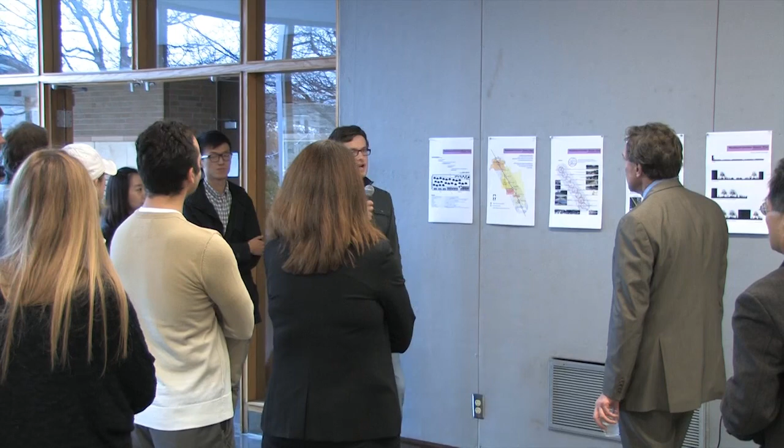The project is looking at the extension of a proposed light rail system into South Oakland County, which would extend from 8 Mile to 16 Mile, covering multiple jurisdictions, all of which are involved with the task force. Our charge was to basically create a master plan for this area, and we've since divided into groups, trying to come up with different alternatives, not only about land use, but also about how the system will work at grade, and what kind of design implementation we can come up with.

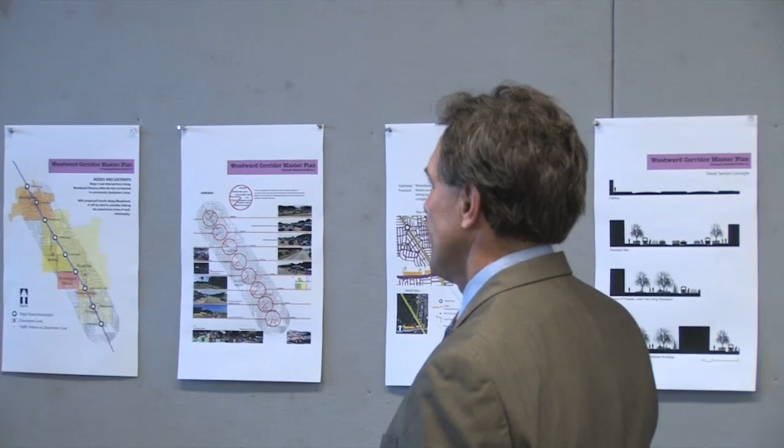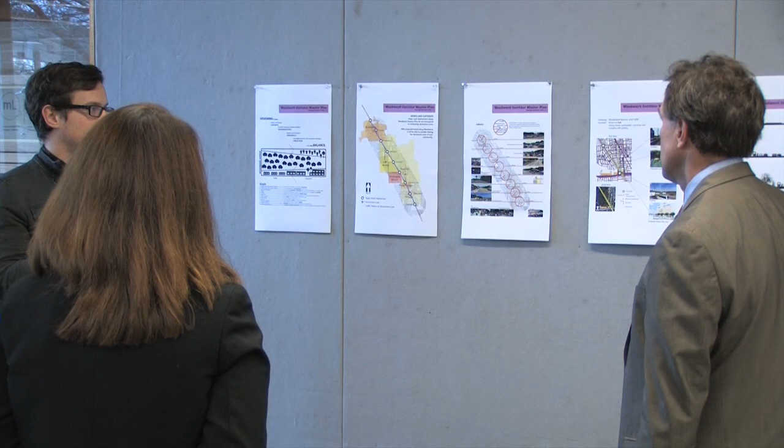I was asking the question, what is a sponsor? Well, the projects aren't a client, so they're not paying us, but Dr. Kim has worked with different project sponsors, community organizations. They had come to him to utilize our studio to assist them in this design process. They have a lot of planning and policy in place already, and that's the foundation, and they wanted us to come in and complete the design end of it.

Cool. I want to talk to the Chinese last. I want to say, isn't this crazy? This is completely crazy, right? We'll come back to it.

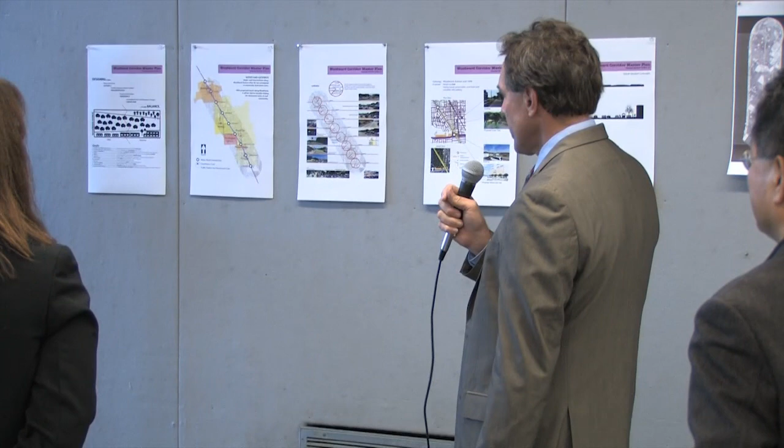I've had 3 trips to Beijing in 2005, 6, and 7. I've been there and worked on certifying the Beijing Olympic Village under LEED ND. That's my little bit of contact with Beijing. But this is crazy. So I was saying at lunch that I favor right now planning for totalitarian countries, because they can just execute. Tell me, you're the planner, tell me your idea, good, build it, and it just gets done. That's fine, it's a little ruthless some days, but at least it's done.

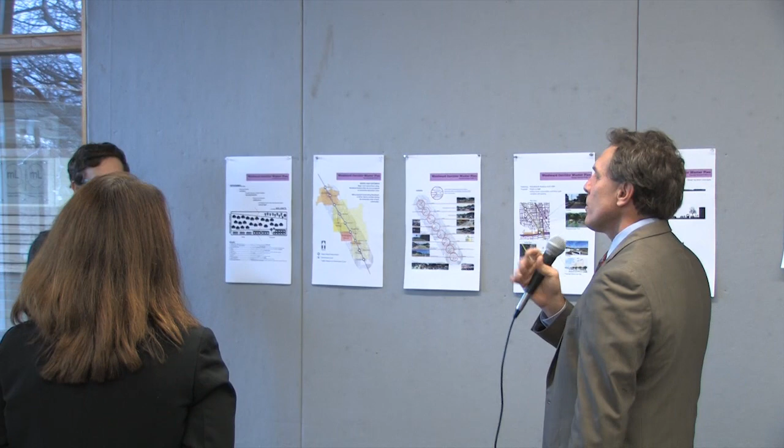So what authority, do you have power or do you have authority when you're doing this work? Are you generating ideas? How do you feel like you're interfacing with people that can actually get things done?

As far as getting things done, we've met with quite a few people from Berkley, SEMCOG, MDOT, and DDOT, and we've gotten a lot of feedback in between. We've been able to bounce ideas off of them, things they want to see happen, things we thought could be possible, and we meshed our ideas together to come up with some pretty decent ideas or pilot programs we could put in different places. As far as authority, we've been told many times don't worry about the actual implementation part of it, that's their job. Our job is just to come up with the concepts, the details, the renderings, to take their ideas and turn them into actual images that they can sell to the community and sell them on to get stuff going.

So I think in that aspect we're slowly getting there, getting more and more information from different people, and as it goes on we find out more stuff. More people are willing to contribute things that they find, because this is Woodward, and there's been many studies, and right now there's one where they've just gotten like 19 million dollars to do another study on it. I think SEMCOG has that, so they're going to be doing their own study, and I believe WA3 and somebody else are actually going to give us their huge findings pamphlet once it's completed, so we'll have all that information to go off of.

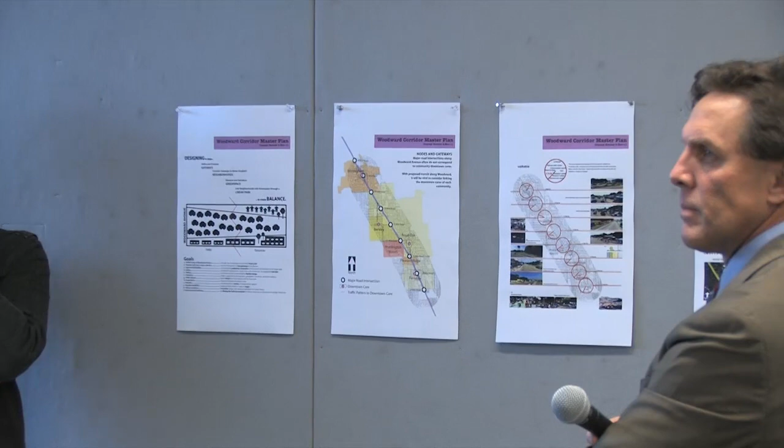And there's large graveyards, and when you first look at it, there's graveyards along Woodward Avenue. This section right here is a gigantic graveyard, and there's another one right here, and I think 2 more along there. So when you look at that, you realize it's a huge, gigantic space. When you first think of cemetery or graveyard, you don't want to touch it, but what we found out from talking to them was that Berkley has tours of their graveyard. So they were saying you could use spaces like that to create more of an entranceway onto Woodward, creating pathways through a graveyard that people would be willing to walk through.

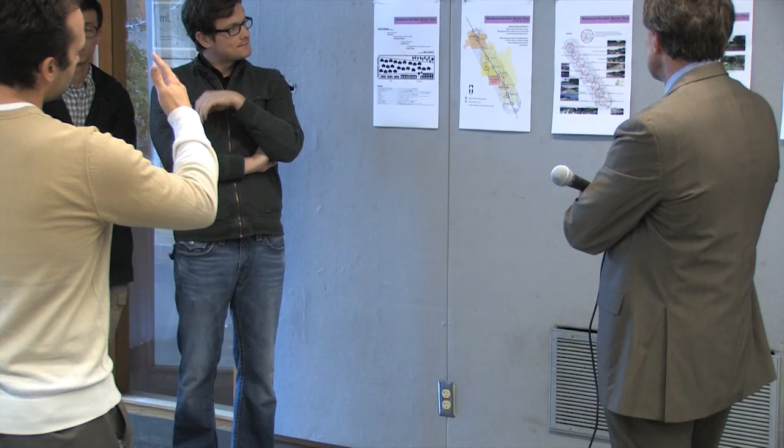So using that type of area to create more of a promenade, places where people can walk in and out of Woodward. That was one of the ideas. Looking at more mixed use, because the residential area is so close and tight knit, right along the back edges of a lot of the buildings, you really can't tear someone's house down and redo. So it's about finding where we can implement more mixed use, how far we can go up, and bringing in mixed use lets you bring in people willing to live and use the light rail, building up commutership. So we were looking at stuff like that.

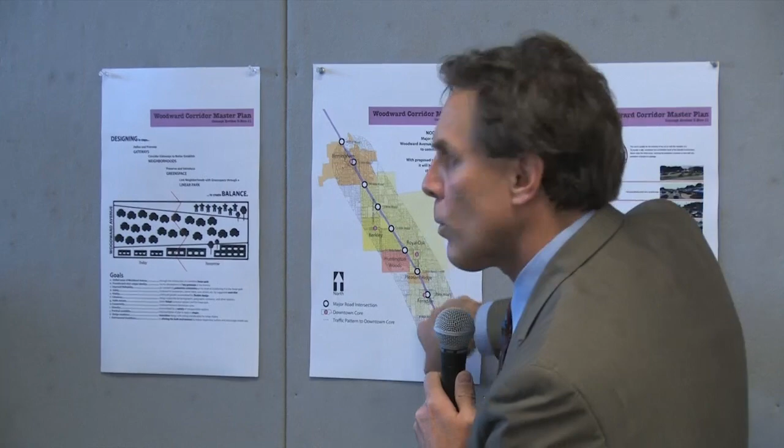So my next question: in doing a corridor study like this, there's a tension between natural places, and on this map I see 4 downtown cores identified. They're a place type with a certain walking pattern. I don't think I heard the suggestion that people are going to walk the 9 or 10 miles diagonally. They want to create that, but do people actually walk that far?

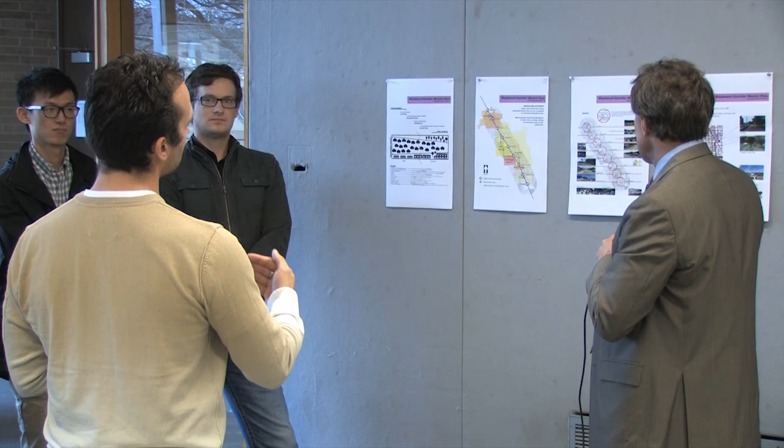No, people do not walk that far. But what they want is to try to turn Woodward into at least a walkable environment, because some spaces have long stretches of concrete or a long wall of a building, and they want to change that to make it more inviting so people don't just stop and turn back. They want it walkable for anyone willing to walk it. They don't expect you to walk 9 miles - that's what the light rail is for. But in between stops, they want that environment to be friendly and inviting, creating a place where people would be willing to stay for a while, which some places on Woodward actually lack.

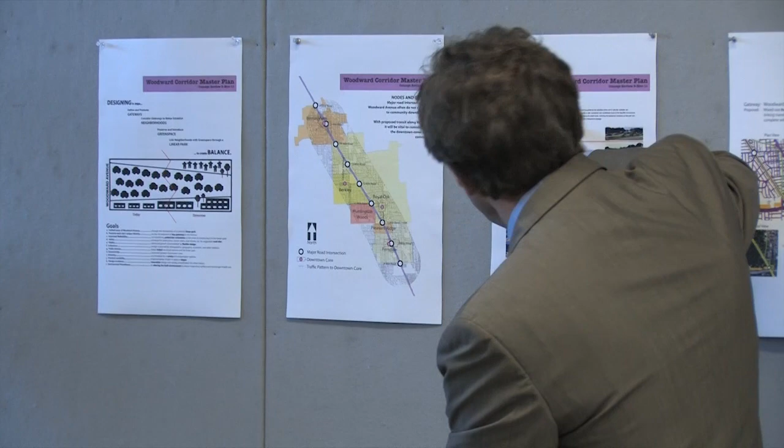What we did is look at Woodward, the corridor, and major roadway intersections - those circles represent the major roadway intersections. As you can see, the major intersections don't necessarily correspond with the downtown cores. So our thought was to take a look at what exactly is a half mile from those major intersections, and then see how much further the downtowns are. So our plan incorporates not only transit along the corridor, but we also tried to come up with a way to link these downtown cores. Our thought was to introduce some type of linear infrastructure that could wind through alongside the corridor, so we'd have 3 types of transportation: the roadways, the transit, and this linear park for walking and biking, etc.

Do other team members want to add anything? You drew the circles too, putting the center at the major mile markers as opposed to the half-mile markers. Talk about that.

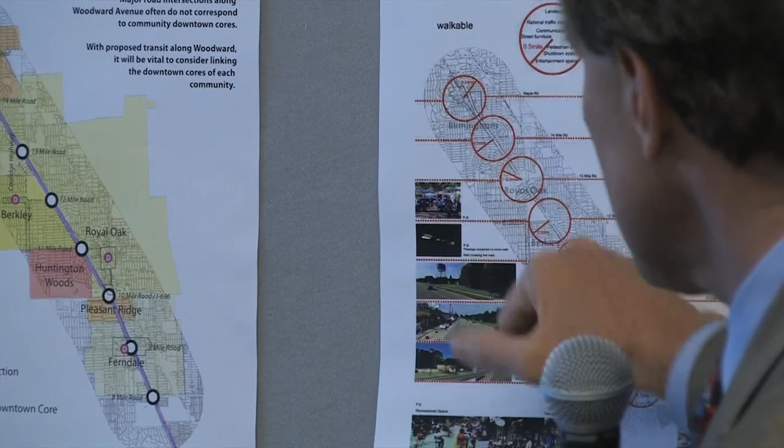A question for you: I can see some of these images beginning to capture how auto-dominated Woodward feels, and it's a pretty rough patch to walk. When you do a TOD plan like this, you can imagine a really big mile road divides that circle into 4 quadrants, so you won't cross from one to the other because the street's so hostile. Sometimes you can't even cross Woodward.

Do we know the dimension of the Woodward right of way? It's like a football field wide, 200 feet, 300 feet? Do we know the number? Some places are 225 feet across, so it's quite large. It's pretty imposing. I think an interstate superhighway is 300, is that right? That's pretty much the acme of unwalkable. So at 225, you're at the outer limit.

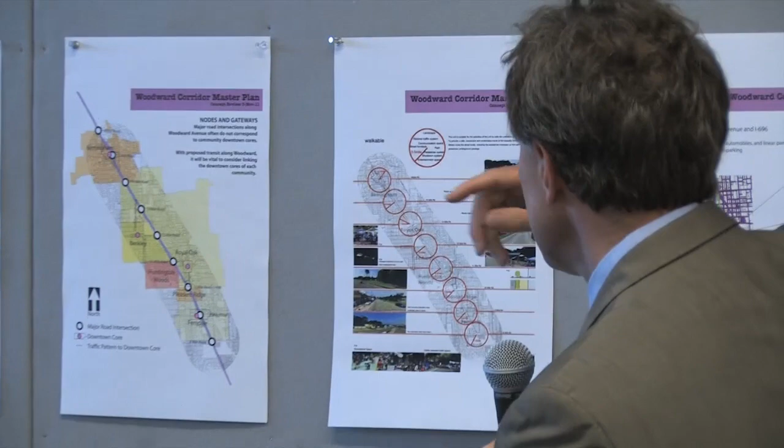Just a couple things to say. We've worked on a bunch of corridor studies that are TOD corridor studies. One is when your group reconvenes to draw new circles, you can draw some bigger and some smaller, or use some as fill and some not, whatever, because these are all a little different.

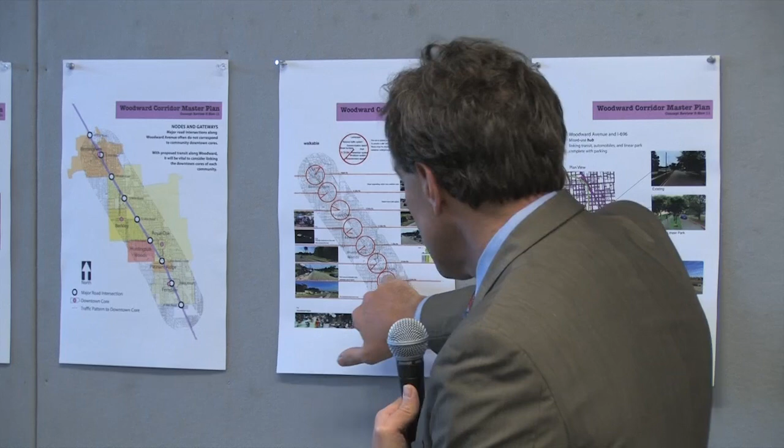Second thing, consider those half-mile markers. I don't know if people have visited Chicago - come to Chicago, you're welcome, you're hereby invited. Because if you look at where the commerce does well today, sometimes there's legacy, like 9 Mile in Royal Oak, or is that Ferndale, whatever - there's inline stores doing just fine. But sometimes when you want to start new retail, if that street is too wide, if the distance from one store to the other across the street is too wide or too difficult to cross, it won't work as inline walkable retail.

So you look for a right-of-way that's no wider than, in our experience, about 66 feet. Do you know the right-of-way widths for each of these streets? We do not. Okay, go measure for the next go-round, because if it's too wide, you really do have 4 quadrants, and the circle is your idea imposed on a different physical reality. Time's up, right?

Can I ask a question? Sure, please. So, do we need to be mic'd?

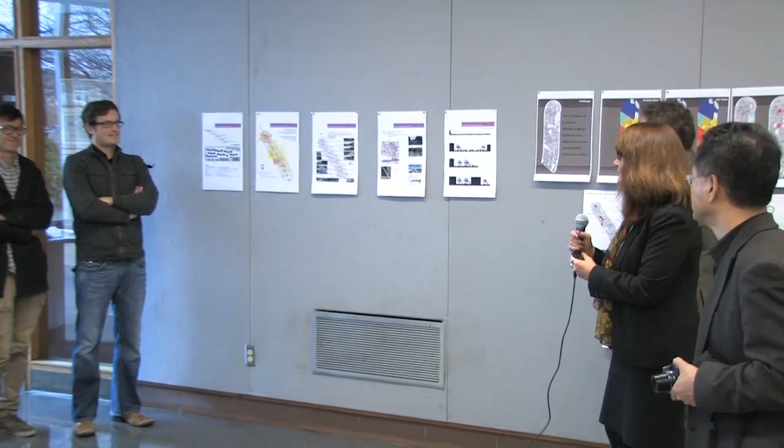Yes. So just to clarify, did your client group site the rail stops for you, or is that part of your charge, to site the rail stops? It's part of our charge. Okay, and did your group do that? I noticed there's a map over here, the group we're moving to - so you haven't gotten to that point yet? We have some ideas and some concepts, we haven't finalized our decisions, but this is the direction we're heading.

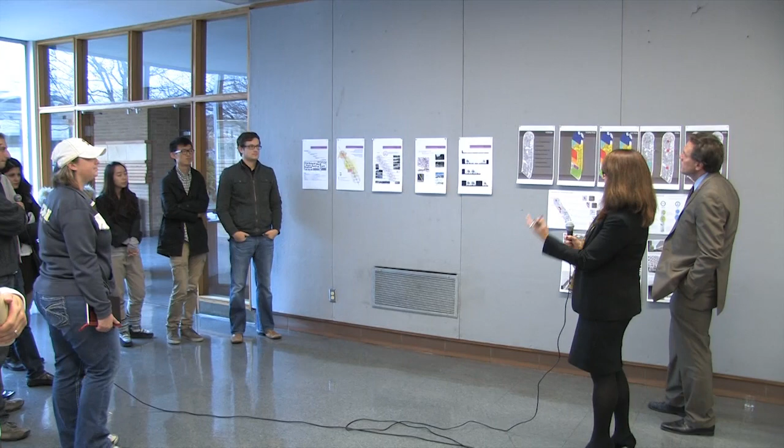The only other comment I'd make is that each one of those communities you've identified has such a different character and demographic profile. Maybe get some sense of that differentiation, that character, as you're documenting your existing conditions, and I think opportunities would flow from there.

Actually, can I comment on that? Of course. That's actually one of the things that Eric brought up, keeping their identity between city and city, along with creating one single identity at the same time. So it's kind of the mesh between the two we're working with right now. We're just starting, but that's kind of the proposed direction.

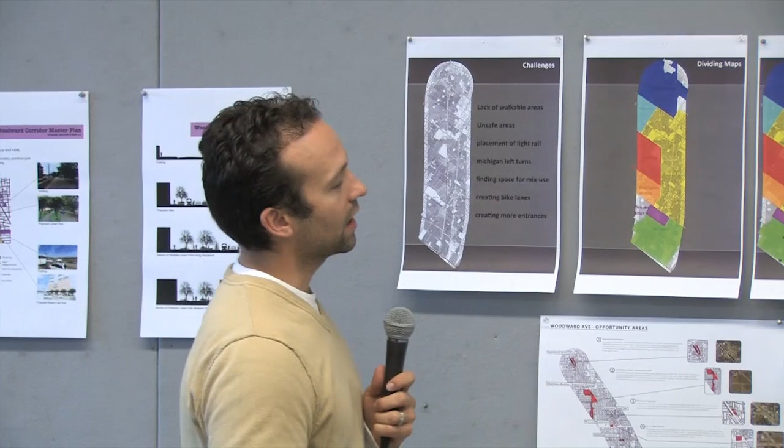What we first started to do on the top row was figure out some of the challenges, and then we divided the space up into its 6 quadrants, the 6 cities we're going to be dealing with. Then we looked at the different rail stops, and of course, in this type of plan, every city is going to want their own rail stop. You can't leave anybody out or you're going to have some issues. So we did 2 little spots where we tried to lump them in to where we could have a few where we can catch 2 cities with this one.

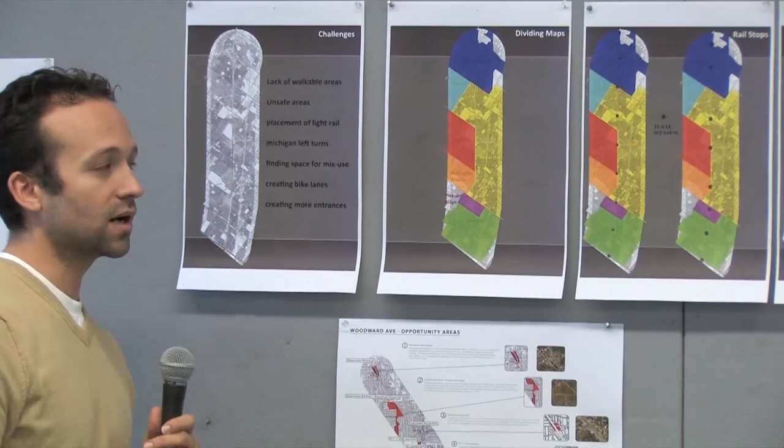We can actually catch 3 cities with this rail stop, 2 here, and then some of the larger ones get their own, but at least we can catch them. Then on the other side, we can actually move it down a little into their own section so they can have their own rail stop. So we're looking at the position and how much ownership each person gets for this rail stop.

Berkley and Huntington Woods, because they're on one side of the street, are going to get that side of the rail stop, depending on how much it is. Then we looked at different style nodes, the large commercial areas in this district.

This map shows what are perceived as known nodes. After some of the first assignments, another group was nice enough to do walking and talk to people. These are the three areas that seem most known and recognizable on Woodward: the zoo around Berkley, and the cemetery and hospital areas. These are the three well-known places — when you asked people, they knew where they were.

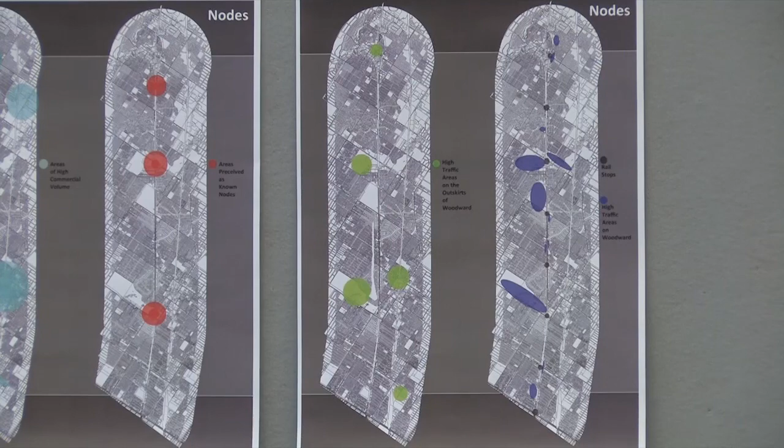Then we go into high traffic areas on the outskirts of Woodward, things we have to pay attention to, like how far the zoo goes out, and some other things. But I also wanted to look at what high traffic areas actually connect, and we found there are actually gaps in between a lot of these spaces.

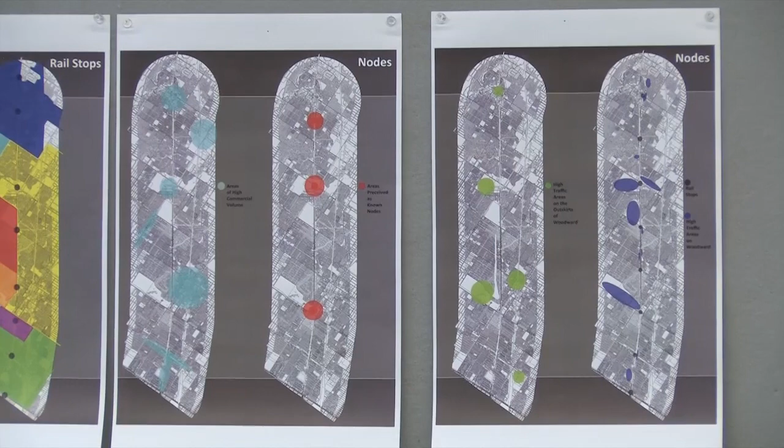Right now we're looking at whether placing a rail stop in the voids, which isn't normally done, can create spreading and more business. Or do you place stops within existing areas, which is what's normally done, to help the business that's already there, letting it spread out and create better, longer, wider nodes. So that's what we've looked at so far.

Now Dan will go over his two portions. I wanted to ask—

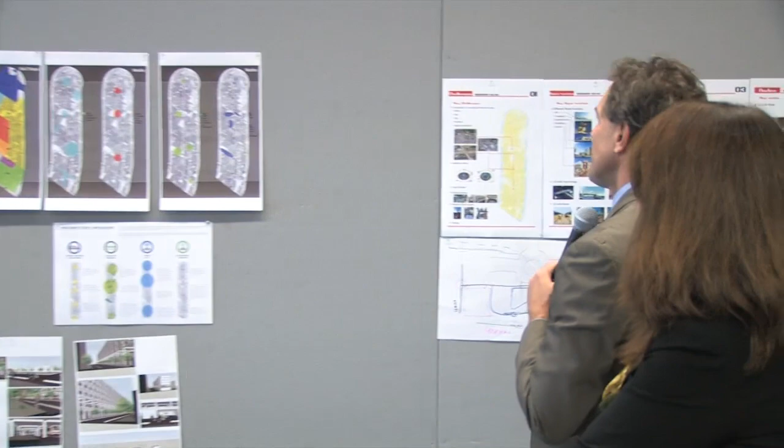Is it a coincidence that the hospital and the cemetery are co-located? I was kind of wondering the same thing. Seems like a co-location.

So then we wanted to look, from that and also from the workshop we conducted with our project sponsors, at areas we considered prime for opportunity. As of right now, I've identified five areas along the corridor. Right in downtown Birmingham, the downtown as it exists is situated along Old Woodward, but Woodward Avenue juts off to the right, and it's not as pedestrian friendly or as much of a downtown feel.

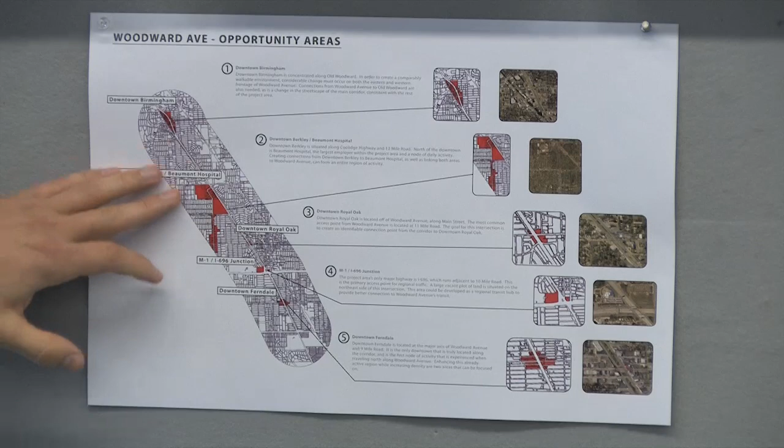So that's definitely an area of opportunity. Also, linking Berkley and the hospital and creating a larger node because of their proximity and because there's so much traffic and activity around those areas. Downtown Royal Oak, being able to link the downtown with Woodward because it's really offset, not right along the corridor.

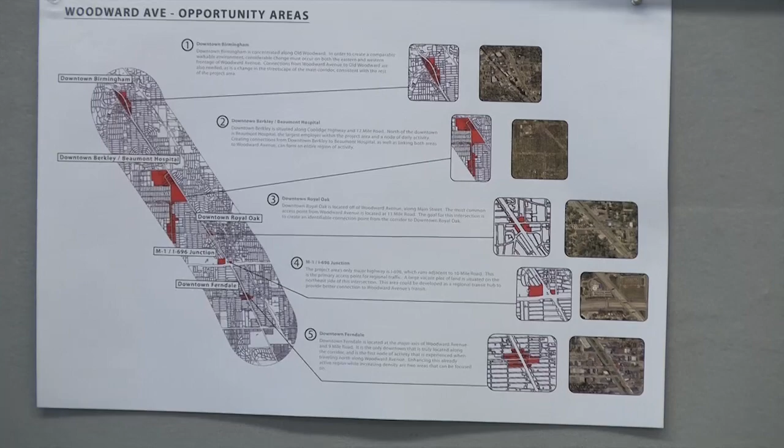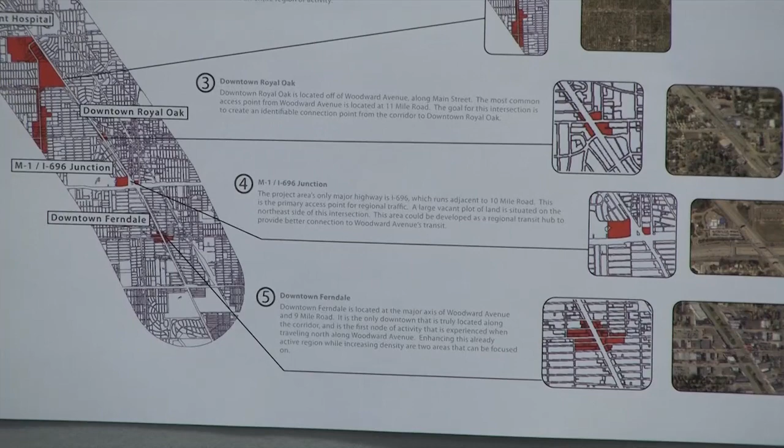Right at 696, there's actually a pretty good opportunity to create a larger transit station and a regional hub, right here. You have the zoo, and across the street a larger plot of vacant land. Because this is a major axis of commuter traffic due to the expressway, we thought this could be a prime location where commuters could come in along the expressway, park, and then utilize the new transit system.

And then also Ferndale, just enhancing and implementing more density there. Tell me about this stuff especially.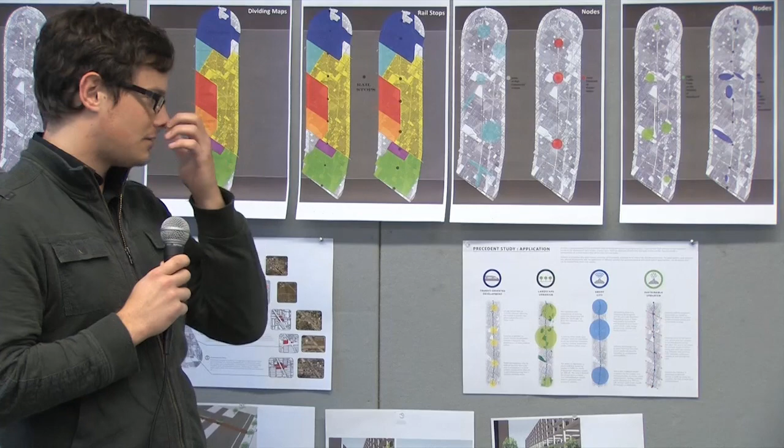Well, we actually did a precedent study. It was part of our second step in the process about a month ago. We looked at four different urban design or urban models, and what I did was try to translate what we learned from the precedent study onto the map, just to give a conceptual feel of what that would look like.

Sustainable urbanism, which is your area of expertise—I tried to think about it basically as a means of applying it to transit. I didn't want to go into as much detail about land use in that area.

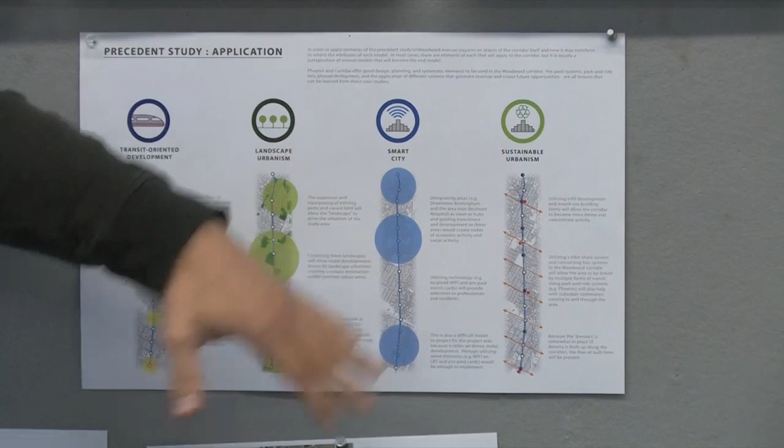What I wanted to do was create better connections along the cross streets, because as it stands right now, the bus system in many instances doesn't actually cross Woodward. In some areas it'll stop along Coolidge and Judd, and it doesn't actually connect. I thought that if there's going to be a major investment in light rail on this corridor, it's going to need connections at all these major cross streets.

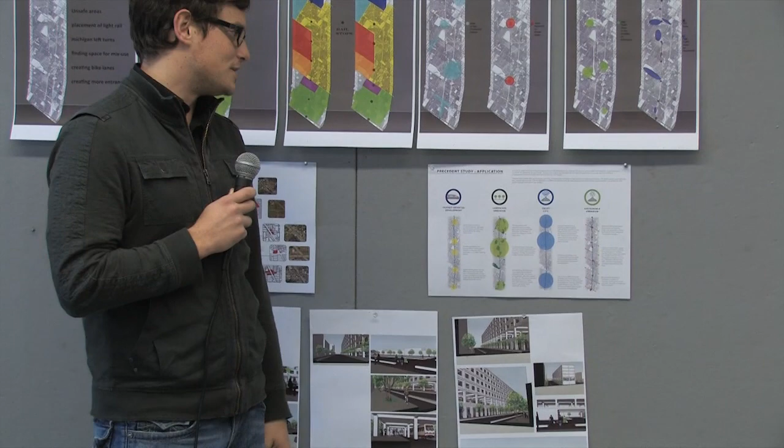Also implementing more park and ride, just because it's such an auto-oriented region—that's definitely something that's going to have to be considered. And then also creating possibly a bike share system, because there are so many downtowns offset from the corridor that are walkable. By creating a bike share system, people could use transit and other means to access those.

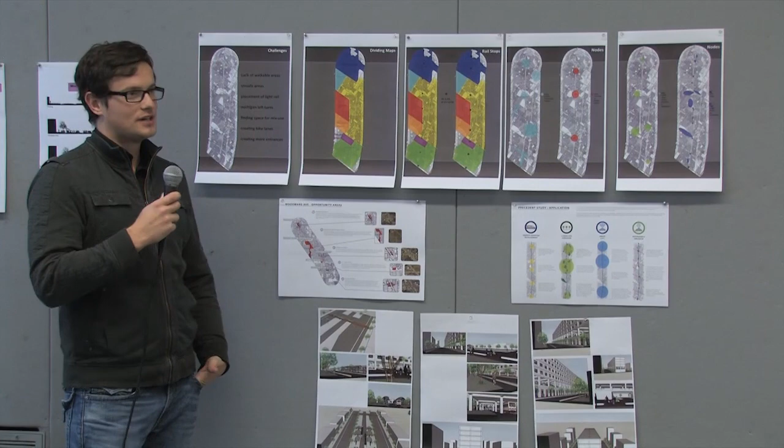Cool. Two questions: are you studying density along the corridor, recording it in some way? We don't have specific numbers at this point, but density is definitely one of the big areas we're going to look at, because traditionally along the corridor, at least commercially, there's one-story commercial with front parking. That's pretty much the norm along the corridor.

So improving that, improving density, really recessed into these neighborhoods—it's all single-family housing for the most part, except for downtown Birmingham and the other downtowns, but just adjacent. And that's also a challenge as you increase density along the avenue.

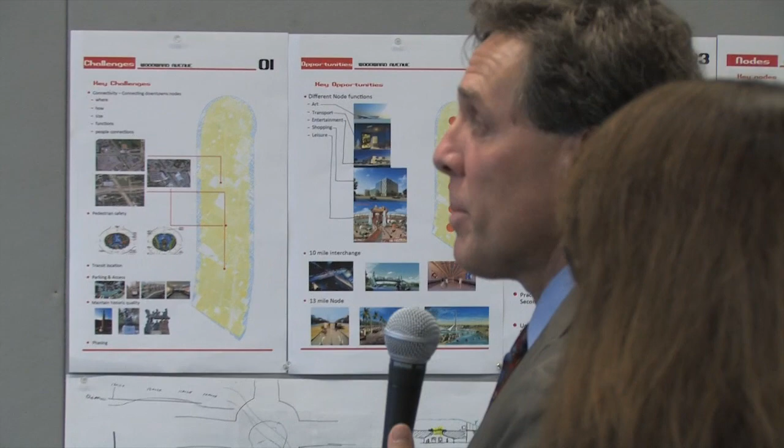The other thing I'd want you to poke around about is finding out if you could look at the census data for households without cars. Yes, it's possible to live in Detroit without a car. Oftentimes it's driven by poverty, which is not preferred, but you'd be surprised—I bet in Royal Oak, I bet in Birmingham, there are people that do it. It'd be interesting to know and map them.

Don't you think this is a change-of-culture project masked as an infrastructure study? If you actually built this, you'd offer a proposition to Southeast Michigan: maybe you can build the cars, you can own the cars, but maybe not here—you don't need one. That'd be interesting. A lot of the work you're doing, you're really an ambassador for—you're the face of this new way of living that could happen here.

I'm a big believer that planners are advocates, and you're out there trying to make connections people often can't make for themselves. So if you can tell those stories and pull them out, you'll succeed wildly.

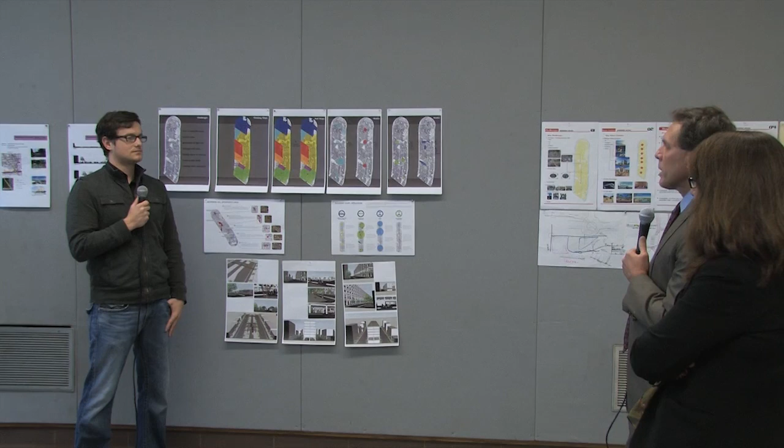I'll push back on the idea that you just think of the ideas and it's the other person's problem to implement them. In school, that's absolutely correct—you should think perfectly freely. But in practice, if you're just the ideas person and you hand it in and it lands with a big thump and dust starts to collect on it, that's a choice. You could practice that, but there are firms that make a lot of money generating reports that sit on shelves, so I scold you not to do that.

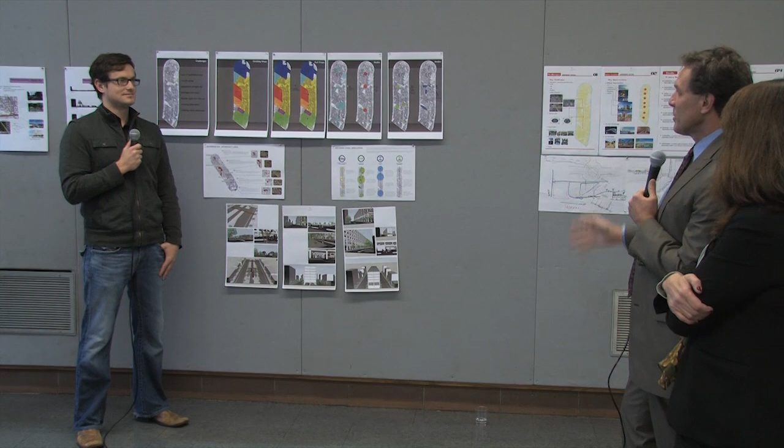I encourage you to be the activist who figures out how to get to 6 out of 6 mayors and get them so excited that the next campaign for mayor is about your plan—like, 'I'm for it more than my opponent.' That happened to me once, and I still have chills about it. That's success, when you reach through.

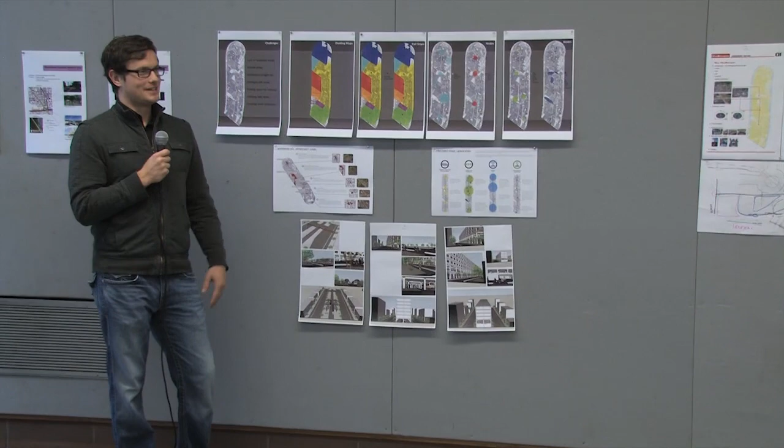How about working with 6 different cities? We haven't really seen the problems that creates, but because they're all invested in this task force, they're already working together, so we haven't had to play the role of mediator bringing them all together. At our first meeting and little workshop, you saw different opinions—Berkley was well represented, so there was a lot of interest and conversation about that, but all in all, they're all working toward one common goal.

So what are these drawings? What's this building right here—is this a building in the middle of Woodward Avenue? That's our ideas about the improvements.

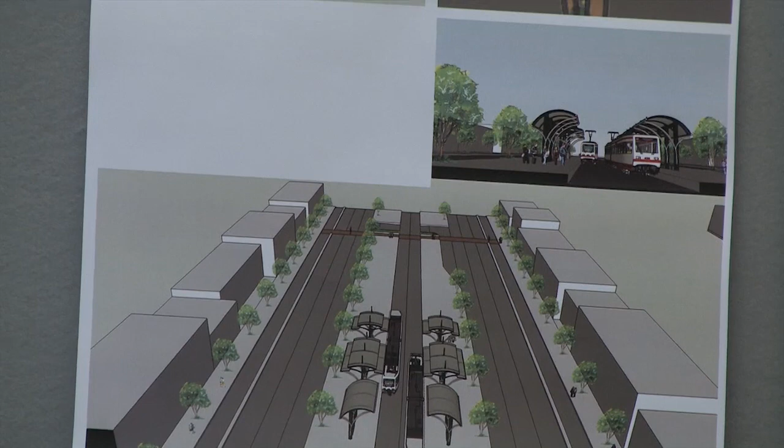I made three models. This is the first one, I think the most initial one here—we're just considering making the rail go in the middle of the avenue. So it will mean canceling one lane.

So after that, we added the two bike lanes on both sides of the avenue. Then we'll plant some trees in the four lanes here, maybe make the road much greener. And that's our first initial design.

We will probably just cancel two lanes on the avenue now, and introduce the track in the middle of the road. That's the station here, with platforms on both sides.

We also made some design at the U-turn section for cars. The cars should go to this lane, the U-turn lane, and wait here because there's a traffic light, since if the light rail goes along this way, they couldn't turn. They just have to wait until the light turns, then go to the U-turn. That will limit the people who use their private cars, I think.

Yeah, and also we have two crazy ideas here. That's the crazy ones, bring it on.

So this one, I was thinking to build a building just above the track—maybe a commercial building, maybe apartments, maybe some other function, maybe a factory, everything's okay. That will narrow down the space of the avenue, so the whole avenue is divided into two small streets that are walkable and friendly for people to walk inside. Maybe we can use some of these spaces as pedestrian areas on both sides, like some streets in Birmingham that are very walkable.

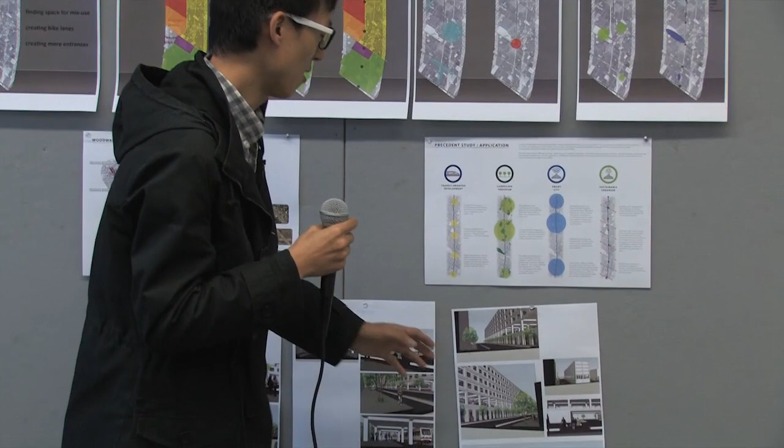So this crazy idea makes the railway run just on the ground, but for this idea I elevated the rail, the track, into the second floor. So the first floor could be used for retail or other functions, more likely to be a commercial street now. I think this one might face too many problems such as noise and other effects from the track, the rail. Maybe it's not quite easy to realize, but it's just a crazy idea.

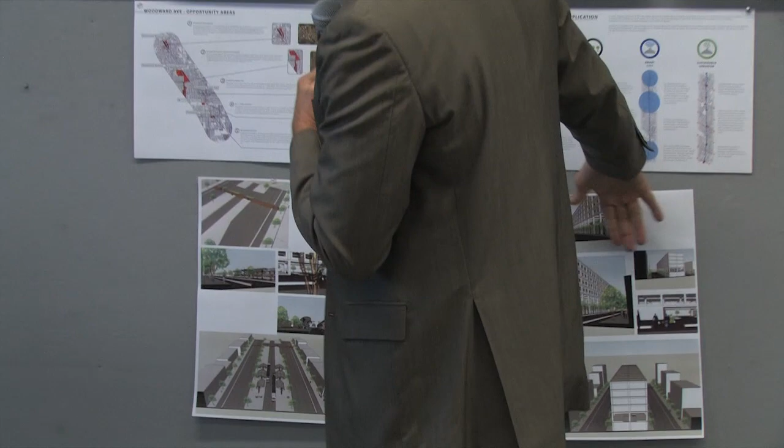They're not crazy. So June and I had lunch today, and I said Woodward needed a building in the middle—this is exactly what I was expecting to see. Thank you, nicely done. But the one thing I was going to say is you've done a good job of arraying choices.

Can you do one more, which is a building in the middle, but the train not underneath, with the train taking up both sides, taking up travel lanes, automobile lanes? Because I think that's not a very pleasant building—you wouldn't want to be under there if you didn't have to. So do one more, but not crazy.

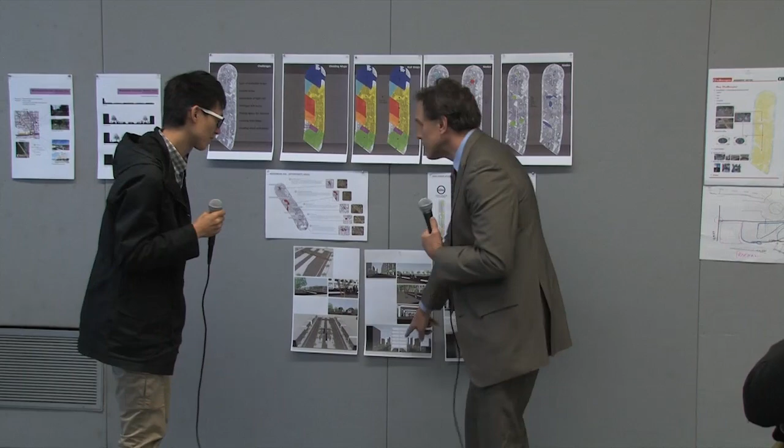It's really neat. Who owns this land? The land now is just grass. It's a very wide boulevard, the median. I know—whose land is it? MDOT. No, it's the state. Correct, yeah, M1 is the state.

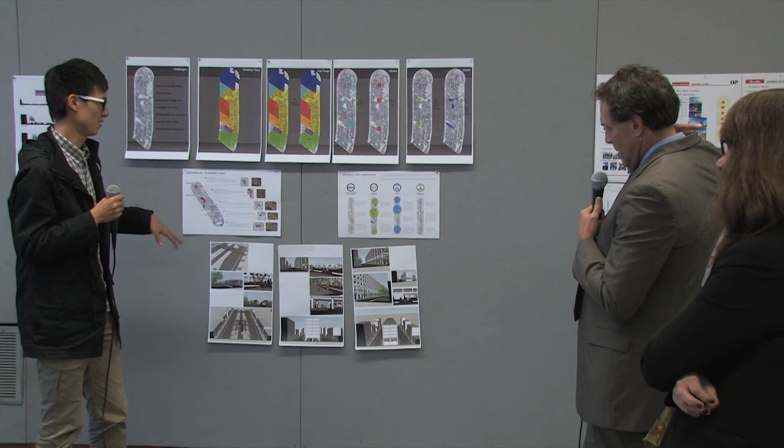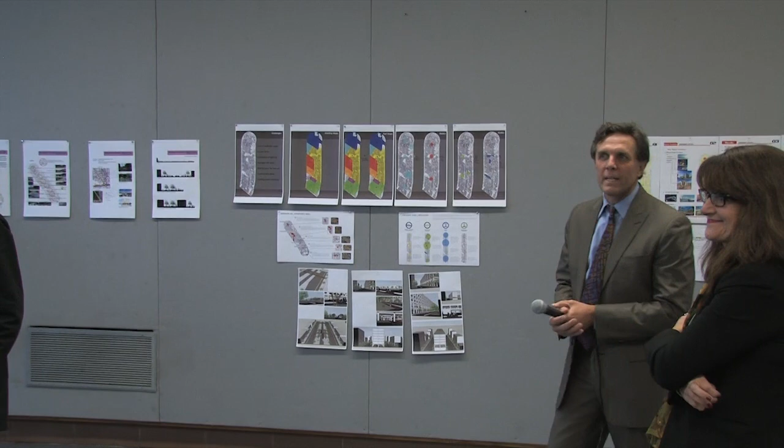Thank you. Who's the tall guy? Hi, good to see you. How are you? Thanks for coming. It's great, we're having a rolling conversation. So Gene is telling us if there's time—is there time to ask a question of this group? I think you should have time.

About my—go to mine now? I'm in the group talking to you. You guys already said? Unless Constance would like to ask, just for one minute.

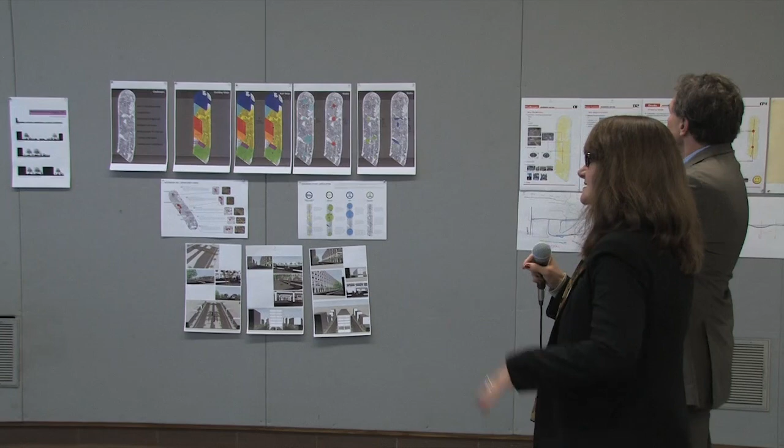One minute? Yes, okay. So quickly, a question about context: are you studying and mapping and analyzing the other light rail proposals along Woodward? Yes, we've looked at the M1 and things like that. We've come across some fake ones that actually seem like they could work—freshwater light rail—it seemed very thorough, but as far as the ones that were actually put out, we've been looking.

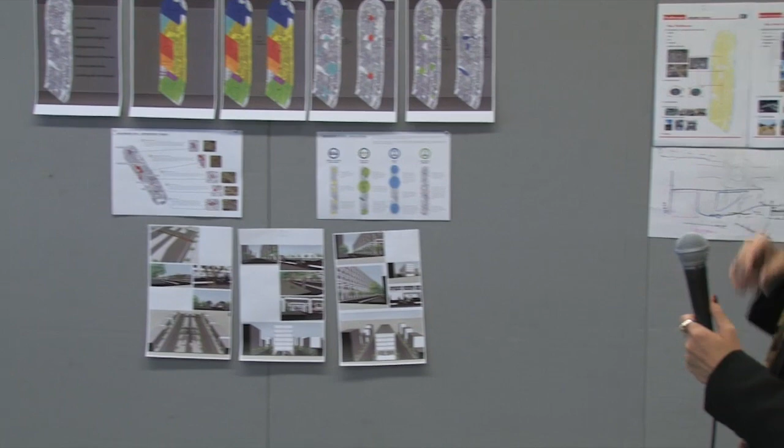I think these bratwurst-shaped chunks of the corridor make very compelling graphics, but as you think about siting stops, these things are generally determined by all sorts of criteria - which system is being used, car length, traffic speed. So the political reality of giving everybody a stop also has this technical overlay, and the corridor doesn't stop and end in your study area.

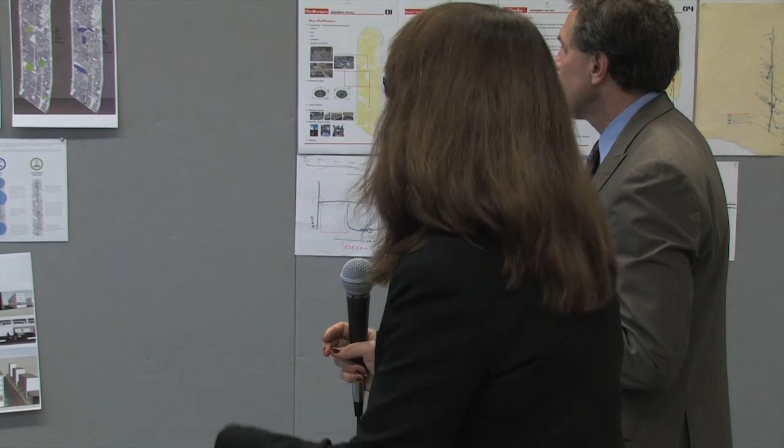I think some sense of what will precede this, hopefully, is the Detroit chunk - from New Center to the entertainment district. And just to reinforce what Mr. Farr mentioned about density, I appreciate seeing it in 3-dimension. If there's any way you guys could do a massing model of just the FAR in the corridor, it'd be very instructive as you move forward.

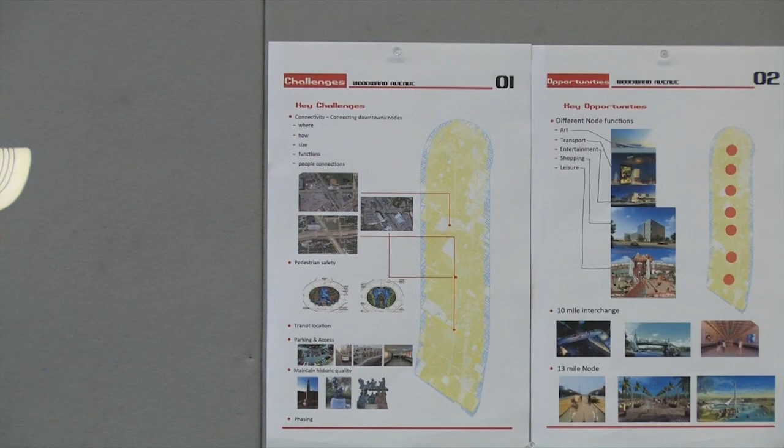One of the first things we looked at is connectivity - that's probably our biggest challenge: how do we connect the downtowns? Where do we connect them? How? What are the sizes? What are the functions of nodes if we create them? Are they just for transport, or do they become something else? And how do people get back and forth between those connections?

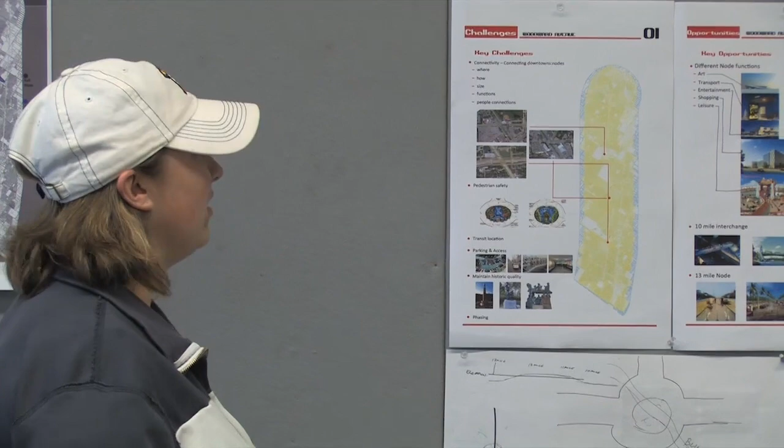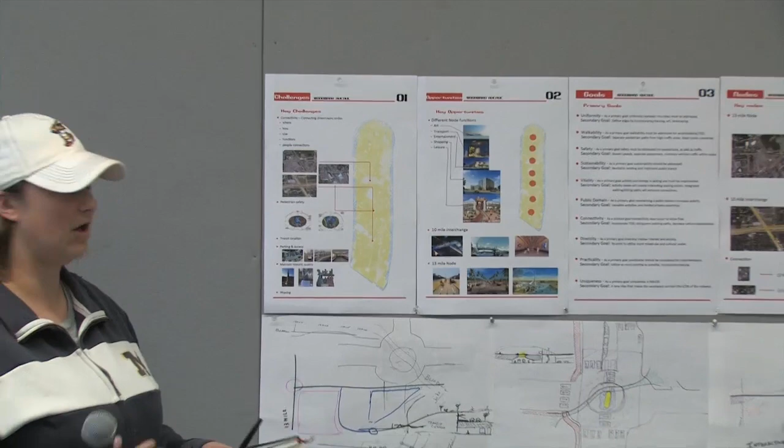The second challenge is how to keep pedestrians safe. They're not going to want to stay along this corridor or walk it if they don't feel safe. So these were some preliminary sketches - do we create roundabouts in certain aspects? Where do we put transit locations? And parking and access - people are still going to drive it, so they'll have to park, and how do those become accessible?

Then one major aspect I thought about is that Woodward itself is a historic corridor - it's known for vehicles, that was the whole reason it was created. So in implementing all these new ideas, how can we still maintain the historic quality of Woodward and not lose the idea of the Dream Cruise and all the big ideas that happen along it? And lastly, the key challenge is phasing - how do we phase it?

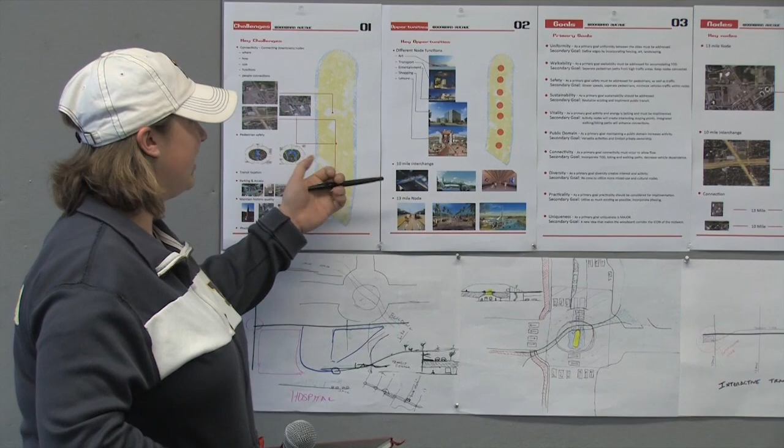From there we looked into the opportunities. As I spoke with the key challenges, we also have opportunities to create nodes and give them different functions - one for art, one for entertainment, shopping, leisure, such as the Detroit Zoo being a major leisure node. Other key opportunities were creating interchanges, such as the 10-mile interchange where the Detroit Zoo currently exists, and also the 13-mile node where Beaumont Hospital is - that's another key node we looked into.

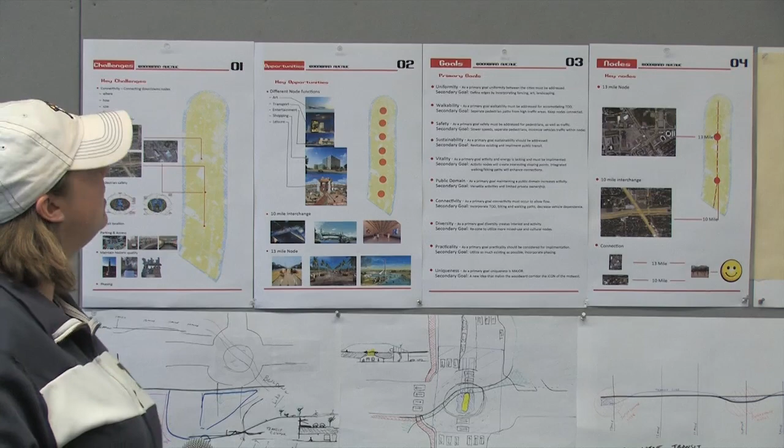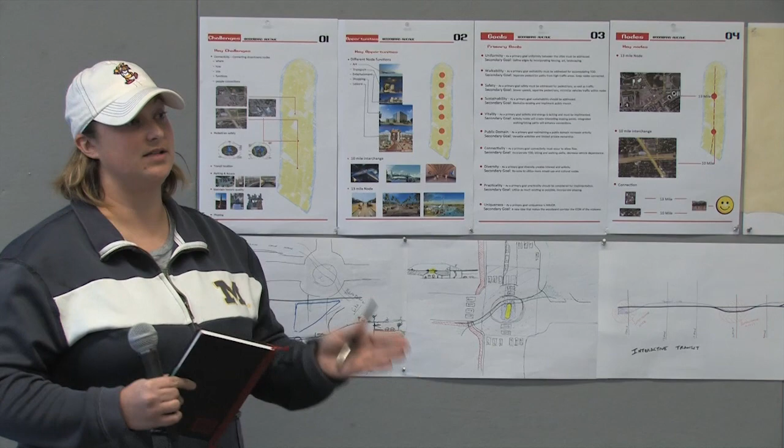From there we evaluated some of the primary goals, and in looking at these we defined the secondary goals in relation to those. The primary goals would include uniformity, walkability, safety, sustainability, vitality, public domain, connectivity, diversity, practicality, and uniqueness. When we think about uniformity, it's obviously how do we maintain this uniform corridor - it could be as simple as putting in fences so all the edges read as one, or placing art, landscaping.

Can I pause and ask - why do you want uniformity? That was brought up in the workshop; one of the groups I was in wanted Woodward to be a uniform corridor to make people walk it and feel safe. But at the same time, they also want to hold on to that uniqueness per each downtown district. I'd consider adjusting the word, because uniformity and uniqueness are in conflict. Yes.

As far as walkability, one of the things we really decided was that we need to create pedestrian paths and separate them from traffic areas. It doesn't have to be just a sidewalk, it could be something more interactive.

Is your partner going to also present? I don't know what you worked out. Possibly, if she wants to, sure. You want to? She's dying to. No, I don't think she is. She doesn't really say too much. Well, we might make her on the next one.

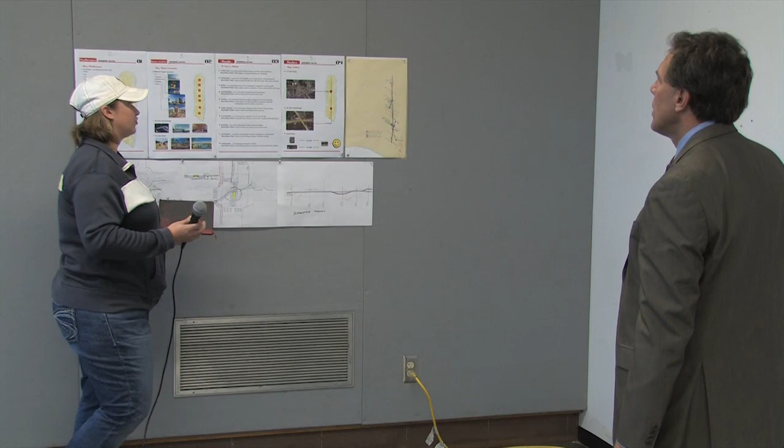So let me sum this one up real quick. Looking at safety, let's slow the speeds down, let's separate the pedestrians. For sustainability, try to revitalize what is there, and implement public transit for public domain, versatile activities, and limit private ownership, making it more public. I'll skip connectivity. For diversity, just rezone and utilize more mixed use, and create cultural nodes. For practicality, utilize as much existing as possible and incorporate things in phases, or construction phases. And for uniqueness, let's bring a new idea, something that makes Woodward the icon of the Midwest.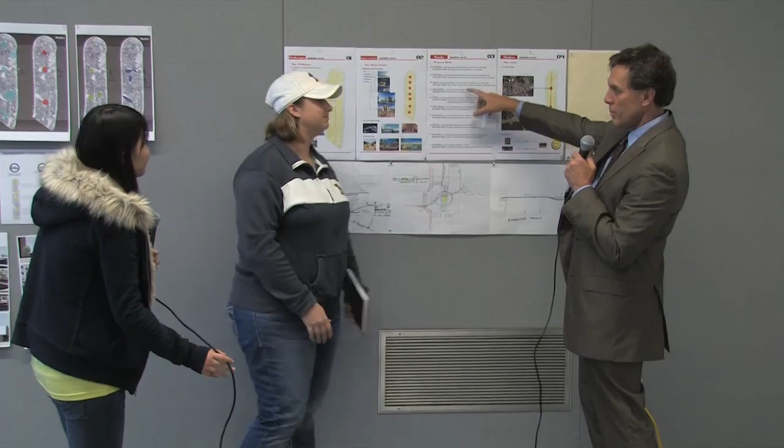This is too many, you've got to distill it down. I think mine can—Andrea says 6. I'm good at odd numbers, 5 or 7. Anyway, 10 is too many, and several of these cancel each other out. Just get that right. Aim for 5. And make them really compelling, maybe even alliterative—the D words or the C words or something. It would be, but a good first pass.

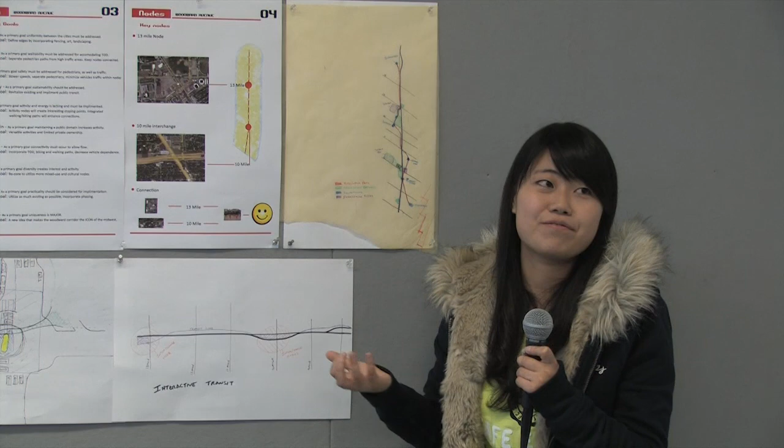Okay, so the keynotes. I think Woodward Avenue is a complex function, so I think we should add some keynotes to help people relax and enjoy their life. So I think I should add a keynote to the 13-mile route, and another to the 10-mile route.

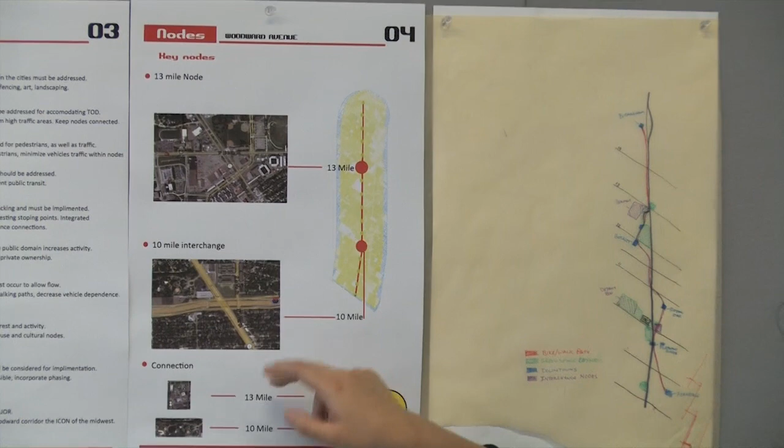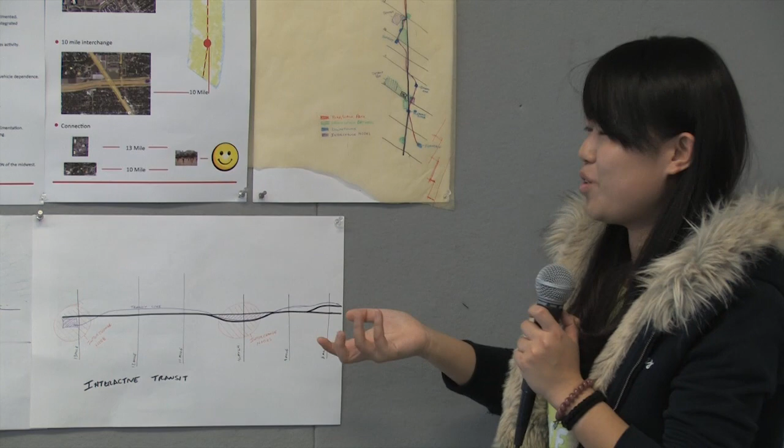In the 13-mile road, there is a hospital, so people can go out in the building and feel the nature. And in the 10-mile road, there is a zoo—I think the zoo is important. So how can we connect the hospital and the zoo to the 13-mile road and 10-mile road to make people relax and comfortable?

So I think we should add some keynotes to the 13-mile and the 10. Thank you. And in addition, after deciding on those keynotes, we wanted to look at the downtown areas and how those connect. Basically in this sketch, black represents Woodward and cross streets.

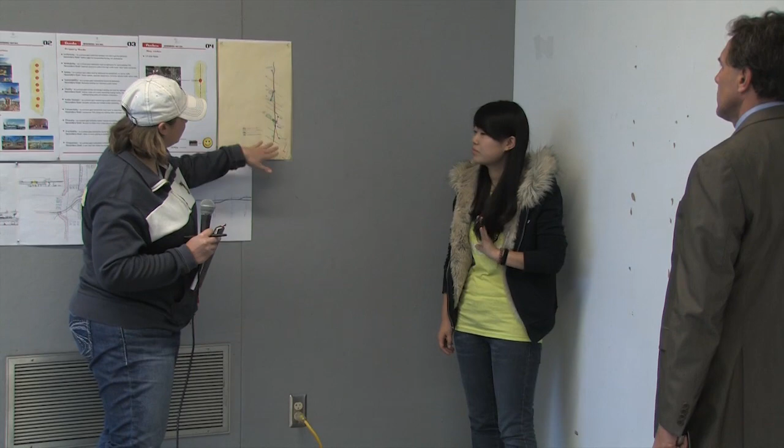The purple is our interchange nodes. The green is existing or proposed green space. The downtown areas are in blue. Then we have a red line showing a continuous walking bike path that connects all of those districts. The idea is that it doesn't go straight along Woodward, but weaves and interacts with the corridor and outside of it, giving people a sense of experience and enjoyment and adding interest to their life.

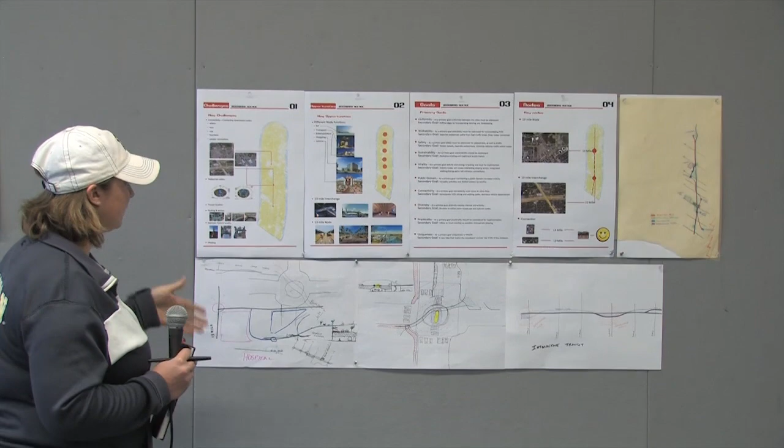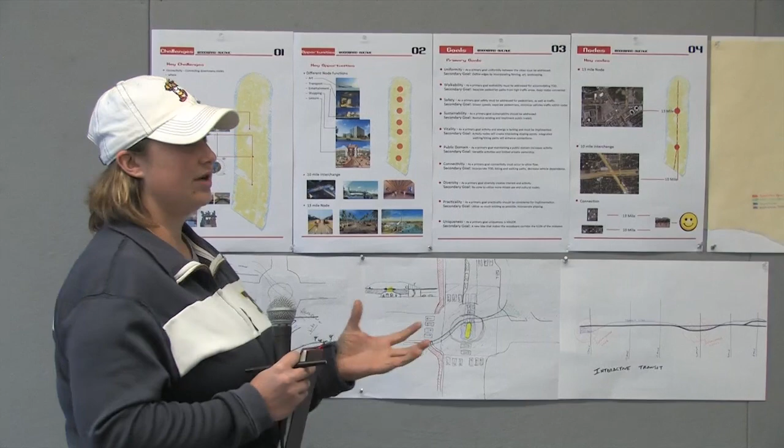From there, we focused on the 13-mile node—what shape it takes and how we'd implement it. One reason it's a key node, other than having the hospital, is that there's also a big plaza and parking lot located there, which Beaumont owns. So if we can get the hospital on board, it'd be a great opportunity to develop there.

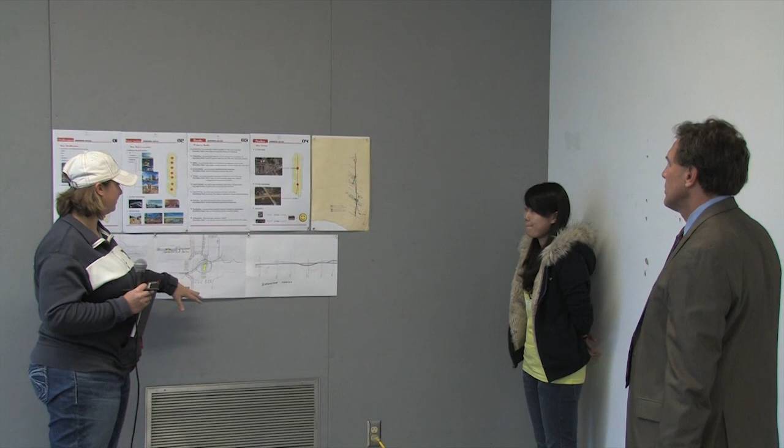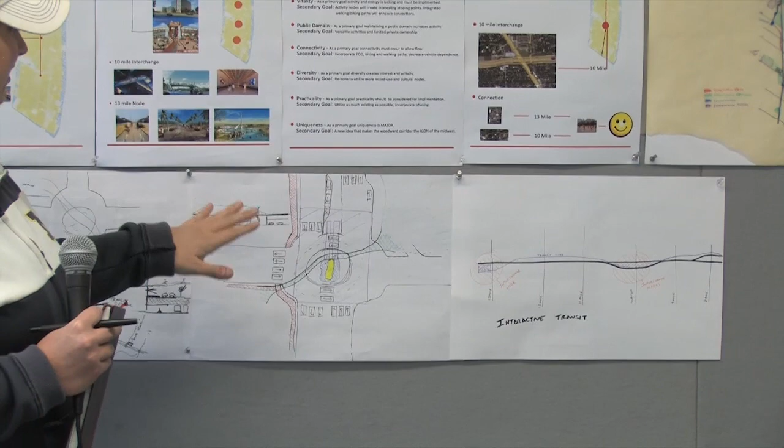Through some of Cece's original research, she looked at doing roundabouts, which I thought was an interesting concept to slow traffic down. So in the 13-mile node, that's one thing we'd implement—a roundabout. The red here is our continuous bike path, and this green is the idea of placing the transit hub underground, extending the natural grass up and over the current parking lot to become a grass pavilion, maybe for an art node. That function could then become an outside amphitheater, adding entertainment for people who live or work at the hospital, turning it into the art district.

And that's basically where we're at. This is just a representation of the transit being able to go underground, then pop back up and go back under at the key nodes.

Thank you, really interesting stuff. I have a question for you—when you're talking to your sponsors, do you feel like the language you use connects to them?

Is there a language that's used in school that when you go out in the real world, there are words they don't recognize, or glaze over, or you feel like they're really excited about?

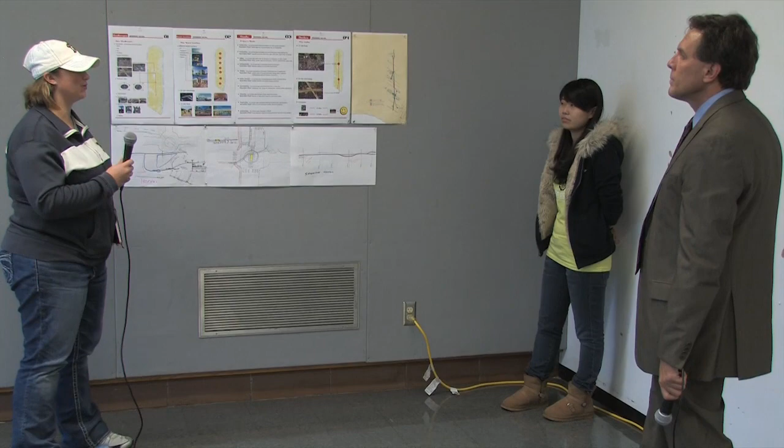It depends, because when I've spoken to some of the sponsors, one thing I noticed is, maybe because I'm not an urban planner, I tend to look at things as let's add more green space, because I relate to green space as opposed to just urban buildings in the urban context. And I know they're very sensitive to that because green means money. So in that aspect, some of the language they don't relate to, but as far as some of the wording, I think they understand.

I guess I was trying to get at, thank you, that was a good answer. I was going to say, one thing that is true is a lot of times the people you're dealing with who have the power to implement your plan are a mayor or a city council. The mayor might have been on the school board, then went to the parks board, and now is mayor, and knows nothing about city planning or transit-oriented development. So oftentimes you are the frontline educator, even for people with much more authority and a title that you don't have.

And that's always a challenge, and I think you're doing fine. I'm mindful of it because this is really hard stuff to communicate as a value proposition in a down economy in Michigan, where there's this incredible skepticism that says, look, in 100 years we're still all going to be driving our own car, and I don't know what you're talking about here, and where's my parking? So you've got to overcome all that and make a compelling case.

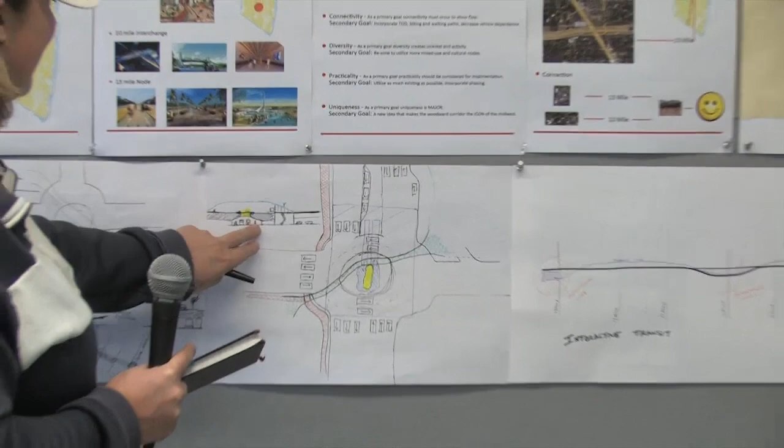What is that green little wrapper? That's the idea of it. You can kind of see it in this sketch of a section. Oh, that's what you're saying. The transit's underground, nature goes over, and then nature goes just over as a path. A bridge. Yeah, okay, so that you can connect without having to go around. That'll be a hard sell.

Of course. Do you want to say something, or ask, since you're joining us? Yeah, just a couple of comments. I also agree the issue of uniformity is a difficult issue. I think what you want to look for is an element or elements that are consistent to Woodward, and then other elements that are consistent to the surrounding communities, and somehow find a way to bring those together.

On the issue of green space, and given the topic today about sustainability, I think there's an opportunity to do bioswales and add green all along Woodward. And this bicycle path, for example, could go in and out of those swales. That's something I think you might want to consider.

And the third question I had: is it an assumption that the mass transit is in the center of Woodward? No, that was just where we thought it would best be implemented, partially because the idea that by putting it in the center, we could potentially locate car parking also in the center, and then that would leave walkability along the edges for the businesses.

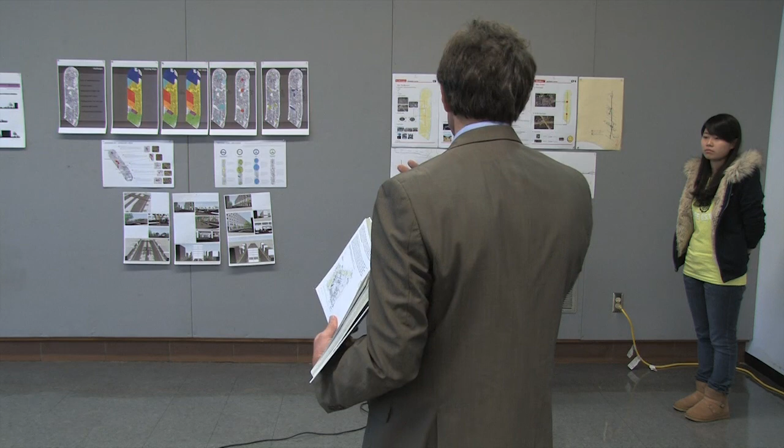In a transit-served corridor, my strategy is to use open space minimally and strategically. This is the place where density should happen, where lots of activity should be. Yes, you need the right amount of open space, but this is definitely not the place to build a new central park, or to exclude new, taller, denser buildings, for the whole region to migrate over some decades and generations into the Woodward corridor, Jefferson and Grand River corridors, that sort of stuff.

So anyway, the diagram here, I pointed to it only to say that that median in Woodward really does look like one of the kind of green buffer edges that sustainable urbanism says is a unit of infrastructure in a way it isn't now. It could filter your stormwater, it could have your geothermal field underneath it, it could have 10 or 20 other things going on there. So it really is a prime piece of real estate.

I think, like the dean, you're the dean, right? I was the dean. You were the dean. Oh my God, I'm not dean anymore. Okay, well you sound like a dean. It was very impressive. I'm not good used to it yet. Okay, you're good at it anyway. We keep it tight. Can we call you dean anyway?

But anyway, just back to the idea that here it's a building, other places it could be a rain facility, stormwater facility, and I absolutely get rid of uniformity, because think about it. If you were on light rail riding this, wouldn't it be neat if you're in Birmingham, it has a Birmingham feel, a half mile, and it's different, sometimes it's tight, sometimes it's wide, sometimes it's overgrown, sometimes it's urban.

Oh my God, that's delightful. You want that variety, that's rich. So just cross it out. And if the person that told you to write that has a problem with it, have them call me, because I really think it's the wrong thing to ask for. I understand the sentiment, but bury it at some other point.